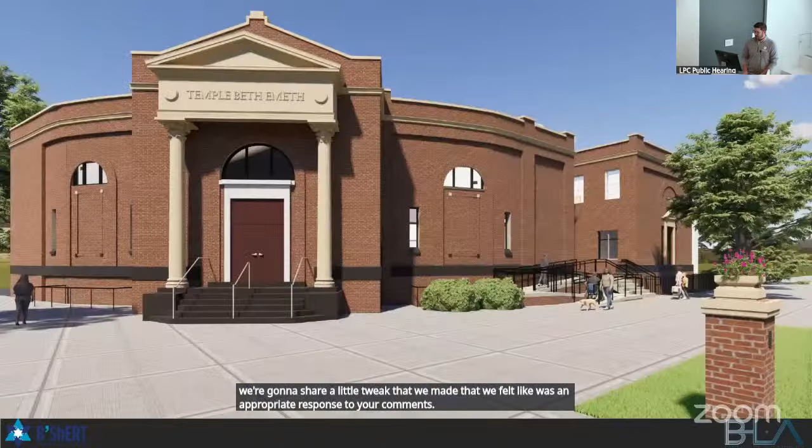So our initial design, which you can see here off on the right side, this is the main front of the synagogue on the corner of Church and Marlborough. We're proposing an ADA accessible ramp and stair, which kind of goes into that alleyway on the right side of the screen.

This would be the view from further down the street. You can see down the alleyway, we were originally proposing a double switchback ramp with some wire infill, and then kind of down in the alley, you can see a glass canopy and vestibule that extended a little bit out from the existing building.

Just looking at this in Axon to kind of give you an understanding of its connection to the building, you can see the ramp out front, the walkway down the alley, and we were trying to align our glass canopy with the existing stained glass mullion. Again, trying to not touch it, but still provide as much light and then coverage to anybody waiting at the front door. The existing vestibule is too short door to door, so we were proposing to pull the front door out in order to make it fully ADA accessible.

Our first review, you kind of expressed some concerns about the railing. You wanted us to explore the idea of maybe sloping the walkway in the alleyway, and then also take a further look at the canopy itself.

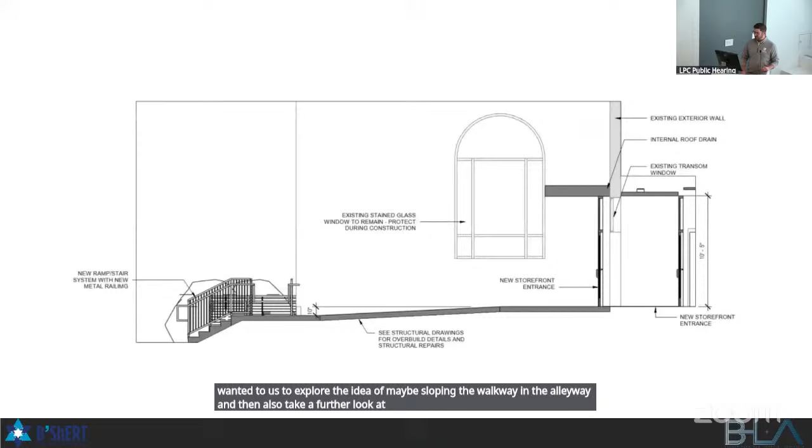So this is a section of kind of what we're proposing. I just want to share with you the sloped walkway. We have an interesting condition where there's existing windows in the alleyway that we kind of have to move our storefront around for the vestibule. So we pulled it all the way back close against the building in order to maintain some coverage for somebody standing in front waiting to get in the door.

And then we stopped our new canopy just short of the stained glass so we don't interfere with it at all. The 1 to 20 slope in the alleyway itself gets us 10 inches of elevation change, which does have an impact on the ramp out front, which reduces it to just a single switchback. You can also see here that we've changed our infill to a vertical infill to kind of get away from the cable infill.

If you look down the alleyway, you can see our shorter, more modest vestibule, kind of addressing those issues. One of the concerns we have with the sloped alleyway coming from the door is that the ramp ends up terminating into stairs, which we feel isn't the safest condition. So we're trying to balance adding accessibility to this building while also making sure it's safe.

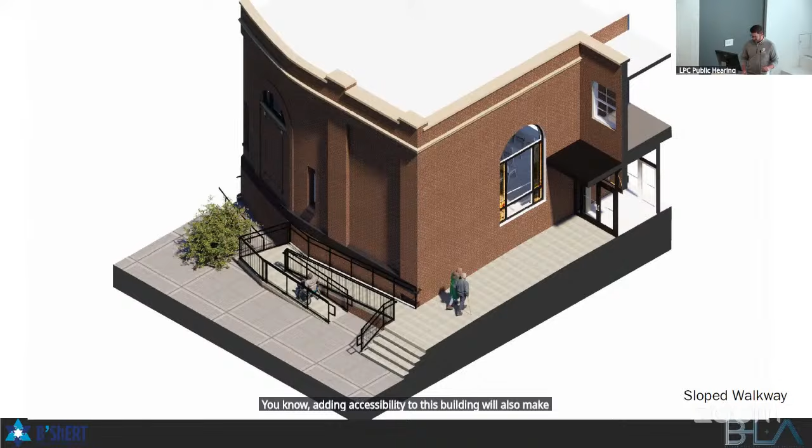We felt like this vestibule response was a good one, so we tried to carry that over into a new proposed design, again with the same vestibule you just saw, but we're getting rid of the ramp in the alleyway to try to remove that unsafe condition.

As you can see from the front here, we go back to a double switchback, but we're removing as much infill as we can by code. So we only have infill on the railing on the first switchback and at the landing, and below that we don't have any infill to remove any visual noise. As you look down the alley, you can see the existing vestibule pulled against the building, creating some coverage for anybody waiting to get in the building.

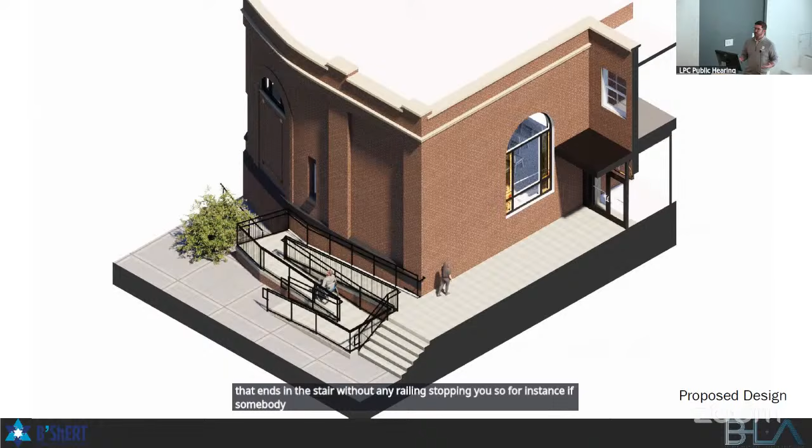Commissioner Ginsberg: I don't quite understand why you're saying the 1-in-20 would be unsafe. Can you explain that, please? So by nature it's not unsafe, but we think a ramp that ends in a stair without any railing stopping you is a problem. For instance, if somebody loses control over the wheelchair, the ramp then rolls down right into a stair and they could go over the edge of the stair. But there would be a level space in front of the stair, and in front of the ramp, yes, but there's still nothing to stop you from continuing on.

Commissioner Goldblum: Could you just put a rail in the middle of the stair? You could, you'd end up kind of hitting yourself in the middle of your body on a railing. While it would stop you from going down the stair, I'm not sure it's the greatest solution. We are happy to move forward with the sloped ramp in the alley; we think this is a fine solution. We just have our safety concerns, and we wanted to present an option where we didn't have that unsafe condition.

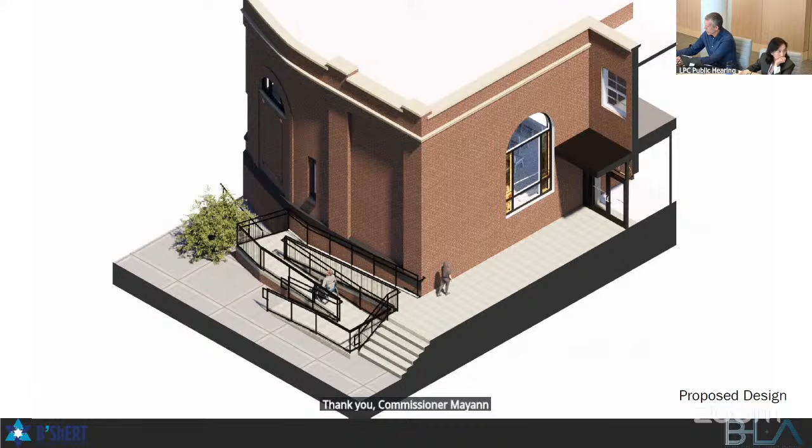Thank you. Commissioner Mann: Yeah, I appreciate the responsiveness to the comments as well. I too think that utilizing the 1-in-20 slope to eliminate one of the switchbacks is ultimately less visually busy and fussy. I would favor that solution. I would be fine with a center handrail at the stair as well, and I think that would likely solve the applicant's safety concerns, as well as clearly meeting all the code requirements.

Thank you. Commissioner Goldblum: I agree, I think that Mark's solution is the way to go. Thank you. Commissioner Kumbe?

And Commissioner Chen: I just want to add, I think the applicant's point on the alleyway 1-to-20 pitch, I do understand, and I concur in the sense that having been a victim several times of flying through black ice, it is very dangerous because of the wet conditions we're experiencing all over the world. That danger exists. Obviously the double-back is a less elegant solution, but from a safety standpoint, I tend to agree with the applicant.

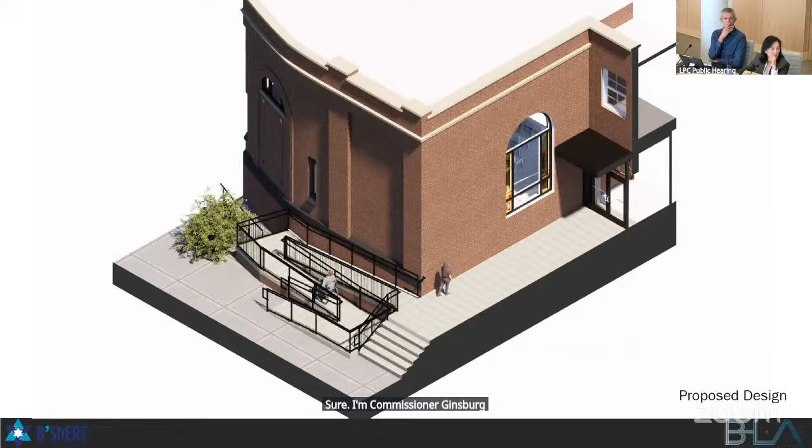Commissioner Ginsberg: That's a valid point. They can always put some electric heating in the ramp that they turn on when they have icy conditions to resolve that.

Good point. I think it's up to the rest of the commission if you think that is the way to go, because the key to radiant heat is to make sure the building maintenance person remembers to turn it on. It was a classic lawsuit where an architect put in a giant radiant heat system on the parking lot so you don't have to shovel the snow. No one ever told the operator. The switch was behind the desk, and it was a multi-million-dollar lawsuit. Wow.

Yeah, I tend to agree with Commissioner Ginsberg and Commissioner Mann. I understand there might be a slight risk with the slope. I think if they explored with staff possibly putting that center rail, that would be very helpful. A center rail will help a lot.

Thank you. Commissioner Ginsberg, would you like to read the motion? Yep, with regards to LPC 25-08077.

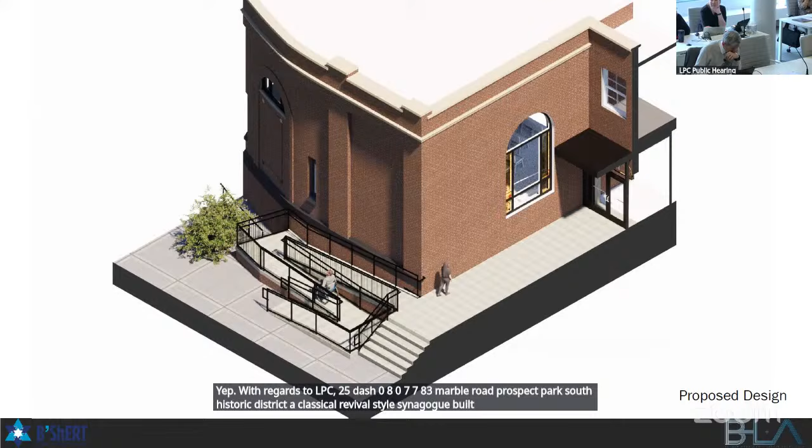83 Marlborough Road, Prospect Park South Historic District, a classical revival style synagogue building designed by Simon B. Eisendrath of Eisendrath and Horwitz, built in 1913. The application is to construct a barrier-free access ramp and entrance vestibule with canopy.

I note that the building style, scale, materials, and details are among the features that contribute to the special architectural and historic character of the Prospect Park South Historic District. I recommend approval as noted, finding that the primary entrance is no longer used by the congregation and the secondary side entrance corridor is used instead. Therefore, the location of the proposed ramp will provide barrier-free access to the entire building in the most direct manner possible while keeping the architectural features at the prominent central entrance intact.

That the removal of utilitarian doors, stairs, temporary ramp, and concealed concrete vault lights will not eliminate any significant architectural features, and the historic brick band course on the building facade will remain exposed. That the existing temporary ramp takes up nearly half of the corridor in this deep constrained passageway, resulting in an awkward, crowded condition, and the proposed ramp and vestibule will create a more welcoming and accessible corridor and entrance.

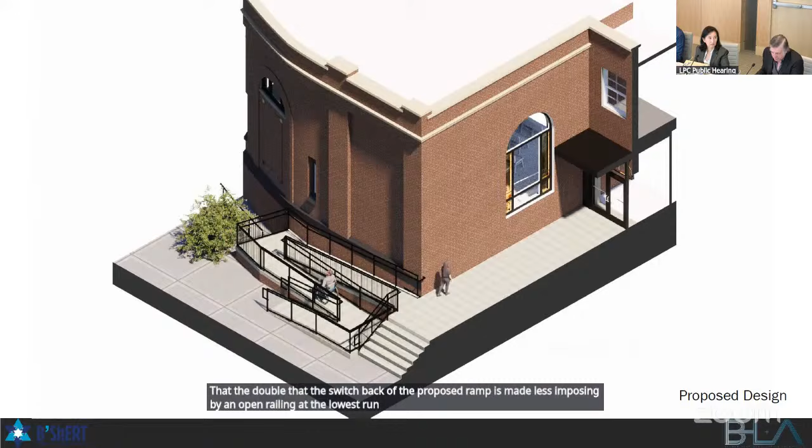That the switchback of the proposed ramp is made less imposing by an open railing at the lowest run. That material of the ramp, including red brick sidewall, concrete curbing, and surface, will harmonize with the material of the building, and the railings, comprising a simple pipe rail with picket infill, relates well to the simple historic ironwork found at the building.

That the new metal and glass vestibule entrance with projecting canopy and applied vinyl signage will be located deep in the recessed corridor with limited visibility from the public thoroughfare, will be light and transparent in character, and will not touch or obscure the adjacent stained glass window. And that the proposed work will not detract from the special architectural or historic character of the building or the streetscape of the Prospect Park South Historic District.

However, we want to see a 1:20 slope of the path in the alleyway so that the ramp in the front only has one switchback. So working with staff to resolve that, and potentially put a center railing at the stair to prevent someone in a wheelchair from accidentally going down the stairs.

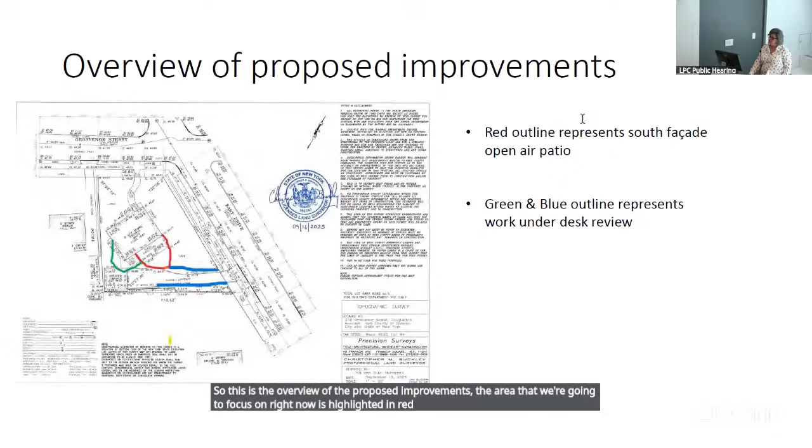So this is what we have currently. As you can see, it's completely inconsistent with the house. It's very modern looking, an eyesore, and it's actually beginning to become problematic in terms of its structure. So what we would like to do is take it down, and in the area outlined in red, we would create a flagstone patio with a covered awning.

So on East Drive, walking north, I've taken pictures to show what a passerby would see as they walk by the property. You could see the solarium when you approach the driveway, and then as you get to the edge of the driveway, you no longer can see the solarium. And so that would be removed.

So here on the bottom we have the existing facades from the south side and East Drive. And on the proposed above, it shows what it would look like once the solarium was gone.

So this is the proposed awning materials that we would like to use. And as you can see on the right-hand side, it shows a sample picture of what the awning would look like extended and retracted.

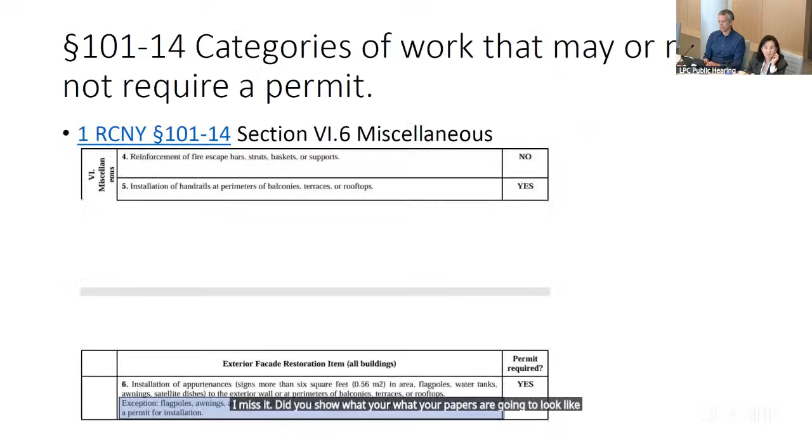Thank you. Commissioners, do we have any questions? Commissioner Goldblum asked: did you show what your pavers are gonna look like? It's irregular slate, matching the front walkway. And is it raised or right on the ground? It's level to the ground.

Any other questions? Let's see if we have anybody in the room who would like to speak on this item. Noting that there isn't, let me turn it over to Stephen Thompson to see if we have any remote testimony. Participants on Zoom wishing to speak, please raise your hand. Seeing none, I'll note for the record that Queens Community Board 11 recommends approval.

So let's go ahead and close the hearing if there's no other questions. Commissioner Mann, would you make a motion to close the hearing? So moved. Commissioner Ginsberg, would you second that? Second. All in favor, say aye. Aye. Any opposed? Okay, the hearing is closed.

I just want to note that the green and blue is actually something that is going to be approved at staff level. So I think what we're looking at here today is just the awning.

Commissioner Chen, would you like to start this one? Having lived nearby, across the border on the other side, not the Douglaston side but the Little Neck side, I'm very familiar with this area. And the applicant is right, the existing structure stood out, so I think to have it demolished is the right approach, as well as converting it to the paving material. I think it's appropriate.

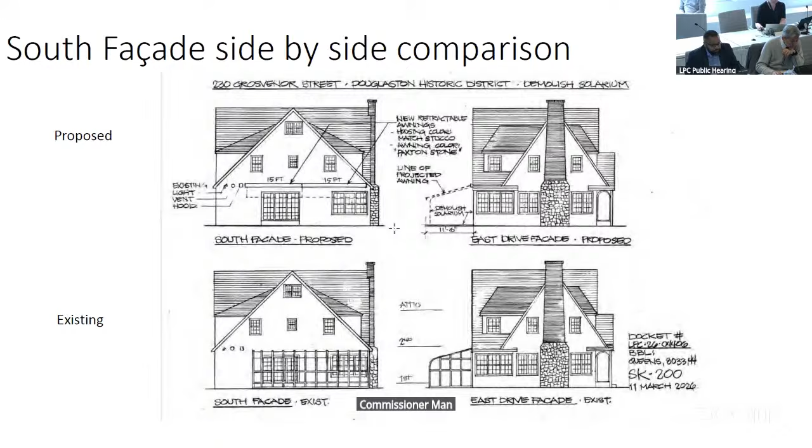Let's move to the next item. Next item is public hearing item number 2, LPC 26-05817, an application for a certificate of appropriateness in the Borough of Brooklyn, Block 1943, Lot 32, 372 Clinton Avenue in the Clinton Hill Historic District. This is an altered neo-Grec style row house designed by Robert Dixon and built in 1878. The application is to construct a 2-story rear deck.

Good afternoon, good morning, Commissioners. James Rusiello, Preservation Staff. The application is 372 Clinton Avenue, an altered neo-Grec style row house. Application is partially to legalize and correct violations, as well as to propose a double height balcony.

The rear facade, which is visible over shorter buildings on Vanderbilt Avenue, at the rear facade of this building, which was formerly a daycare center and is being converted to residential use. A fire escape that was put up in the 90s without permits, which altered the cornice and installed railings at the roof, was taken down pursuant to a permit.

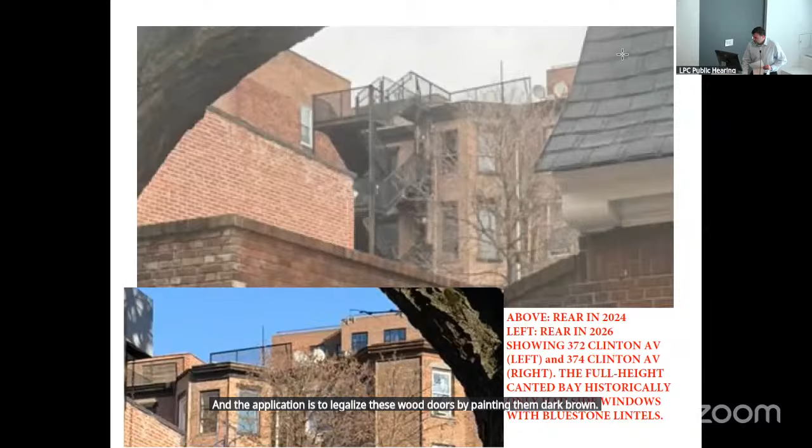Just going to go through. So here's the visible fire escape that was removed. The top floor window of the row house was altered by raising it a few inches with the insertion of the door. Again, the applicant is proposing to paint this door dark brown. Here are some visibility studies. And the application is to construct a double height balcony seen here.

Thank you. Commissioners, do we have any questions? Forgive me, I should just say, we have Agnes Muczynski, the applicant of record, with us as well for questions. Thank you. Commissioners, do we have any questions? Doesn't look like we do.

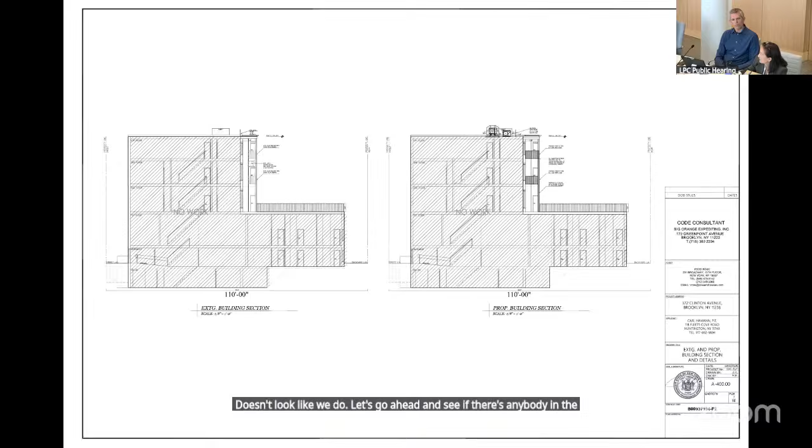Let's go ahead and see if there's anybody in the room who would like to testify. Noting that there isn't, let me turn it over to Stephen Thompson to see if we have any remote testimony. Participants on Zoom wishing to speak, please raise your hand. All right, seeing none, I'll note for the record that Brooklyn Community Board 2 recommends approval.

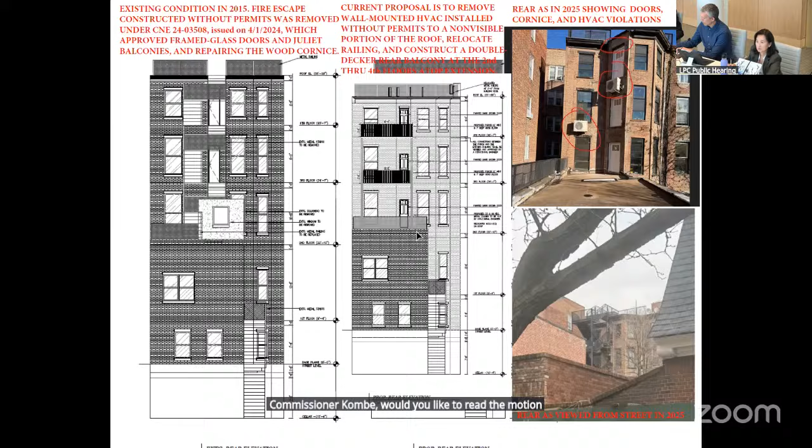Yes. In the matter of LPC 26-05817, 372 Clinton Avenue, Clinton Hill Historic District, an altered neo-Grec style row house designed by Robert Dixon and built in 1878. This application is to construct a two-story rear deck. I note that the building style, scale, materials, and details are among the features that contribute to the special architectural and historic character of the Clinton Hill Historic District. I recommend approval, finding that the proposed work at the rear facade will be seen only obliquely and incidentally from the limited vantage points of Vanderbilt Avenue over shorter buildings and will not call undue attention to itself.

That the rear facade was previously altered and the modifications to shorten the bluestone lintel at the top floor do not detract from the facade composition, that the proposed two-story metal deck with picket railings at the side of the projecting bays will be simple in design and will not overwhelm the residential scale and character of the building, that the wood door in the modified opening at the side of the bays accessing the new deck will be painted dark brown to harmonize with the building's existing fenestration, and that the proposed work will not detract from the special architectural and historic character of the building or the Clinton Hill Historic District.

Thank you. Commissioner Chen, would you second that motion? Second. Thank you. Mark, will you call the vote? Vice Chair Master, aye. Commissioner Chen, aye. Commissioner Ginsberg, aye. Commissioner Goldblum, aye. Commissioner Kombe, aye. Commissioner Mann, aye. With 6 in favor and none opposed, the motion passes. That's been approved. Thank you.

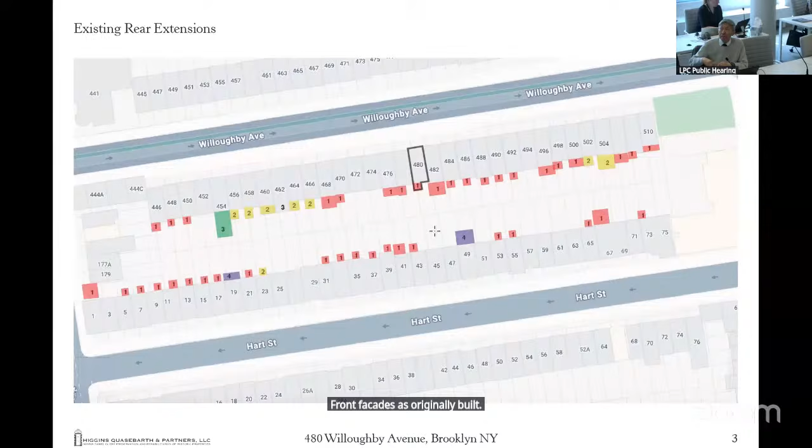The current block plan with existing rear extensions. The houses on the block were mostly developed in a short period of time between 1882 and 1884 on Willoughby Avenue and about 10 years later on Hart Street. Most of the houses were built with partial 1-story extensions, but around the block over time, many of these have been enlarged into full width extensions or partial extensions of 2, 3, and in a few cases, 4 stories in recent years prior to designation.

So what distinguishes this district is the preponderance of 2.5-story houses, as well as the way that those houses have evolved over time. As noted in the designation report, most of the district's houses were built as 2.5-story houses, with a few exceptions that were built to a full 3 stories. By the early 20th century, many of the original 2.5-story houses had been raised to a full 3 stories. This is clearly visible in the streetscape, where we see houses that pop up higher than their originally identical neighbors.

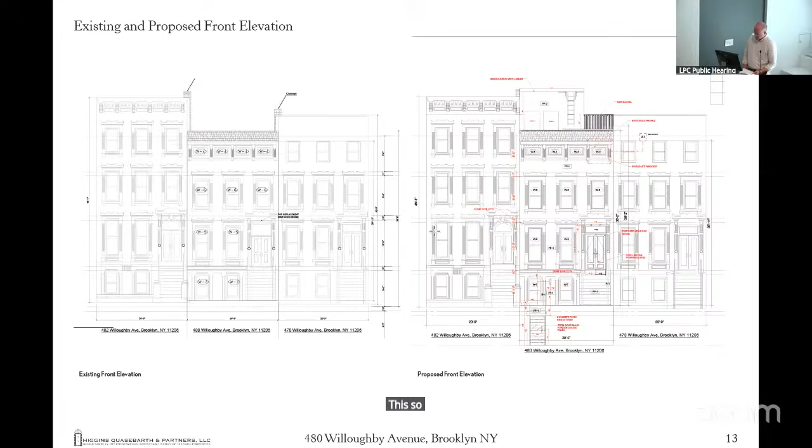So to look more closely at the scope under review today at the front, this elevation calls out all the scope, but we'll look at these top 4 windows first. Again, these are the short windows that are part of that characteristic top half story contained within the cornice.

If historic brick molds are found under the existing panning, they will be retained or their profile will be replicated for the new windows. If there is no evidence of the original brick molds, a typical neo-Grec profile will be integrated into the new windows.

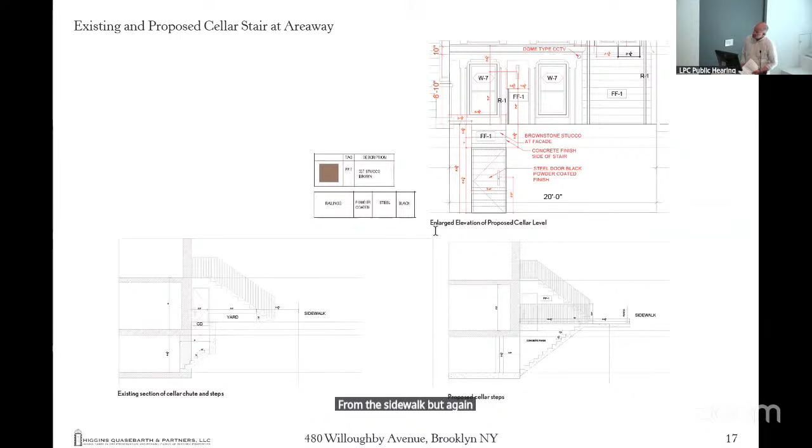Again, it's 12 feet 5 inches. The lots are 20 feet wide and 100 feet deep. The existing house is 20 feet by about 42 feet. At right is the plan with the extension. As you can see, it doesn't exceed the projection of the neighboring existing extensions, and of course it maintains a 30-foot rear yard.

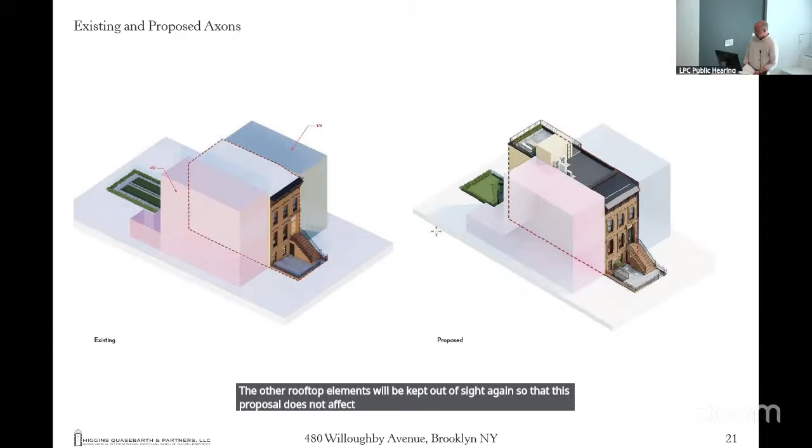Just some axonometric views for clarity. The roof of the extension will have a usable terrace with a railing, but the other rooftop elements will be kept out of sight so this proposal does not affect visibility from the street. The bulkhead and mechanicals—we've tested the visibility of those, so those are approvable at staff level.

Elevation—I think I'll move to the section. I acknowledge that approval of full height extensions is not necessarily very commonplace at the commission. We do think, in the context of this house and the constraints of its historic top floor, the strategy for an addition here is to retain the house's contribution to the historic streetscape as an original 2.5-story facade and add usable space at the rear where it will not be visible.

The rear simple windows, proposed for the rear extension. Here are plans that just illustrate this in plan form—you can see the layouts within the extension and the windows accordingly.

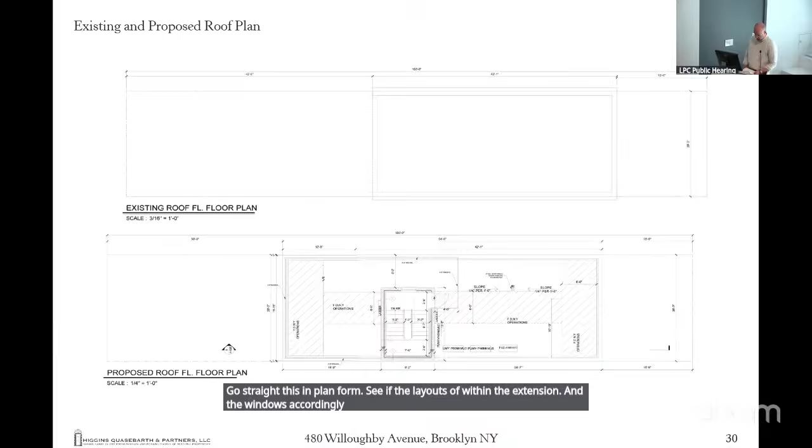And I'll conclude with the front facade. Again, this is an addition project oriented toward preserving the 2.5-story facade characteristic of the original development of the district. The windows will return that attic level cornice to its original appearance and modify the areaway to provide egress in the context of an overall restored bluestone areaway. Let me know if you have any questions.

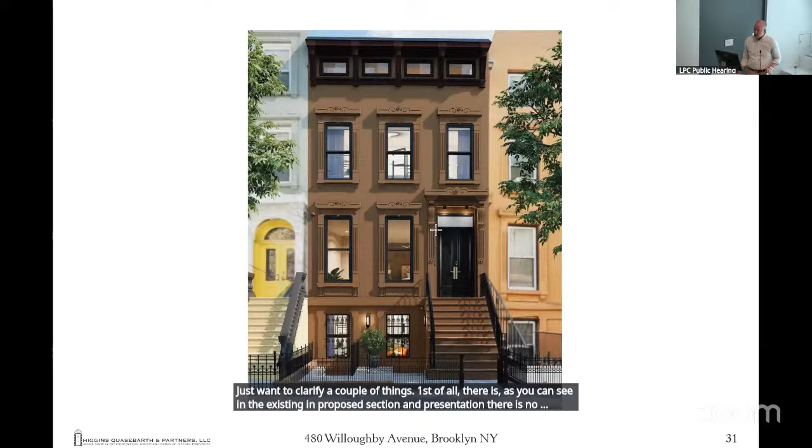Again, the rooftop bulkhead, which was mentioned by the community board, does meet rules for staff level approval. So it's not really part of the hearing scope today.

With regard to, I also just want to clear up any confusion. There was a mention of the idea of purchasing a house and exceeding building restrictions. I want to make clear that the addition is as of right under zoning. Also, the house was purchased 14 years ago, so it was certainly purchased before it was a designated district.

Certainly drainage is a legitimate concern, and obviously a proper drainage system will be part of the DOB review of the extension. We do believe that in this relatively spacious open yard, the 12-foot added depth, retaining a 30-foot yard beyond that, will still maintain a lot of open area in the rear.

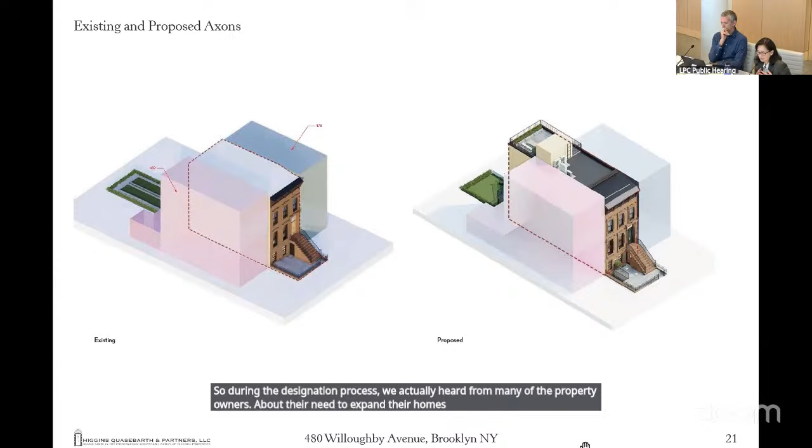is the first commission level application that we've had for this new historic district. So during the designation process, we actually heard from many of the property owners about their need to expand their homes to address family needs. At the time, Chair Carroll acknowledged this concern and noted that we understood their need and that we would work with them to accommodate that consistently with Landmarks law. So given that,

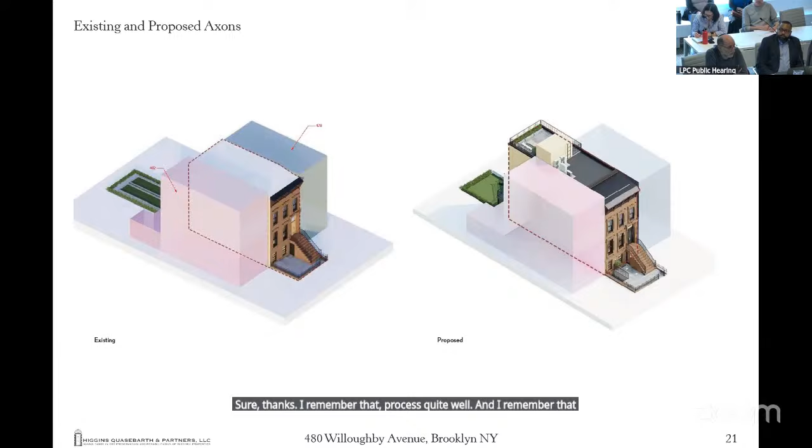Commissioner Goldblum, would you like to start this discussion? Sure, thanks. I remember that process quite well. I remember that statement by Sarah. And I think that, as the first out of the gate, this project does have a certain importance to it, as it does kind of set the path for how folks should look at it.

I think that the applicant made a tactical error here. I mean, the argument was, we're going to not touch the front, so we'll touch the back in a way that you never permit, or you rarely permit. I think that was a mistake.

If you look at the streetscape, it supports a higher front, especially with a mansard, which we've approved many times before. I think that the distinctive cornice is noteworthy and attractive, and it's lovely if they want to keep it. But I think that the adjacent buildings certainly show modifications that could support changes. I think that our precedents in other places would support that.

I think that the notion of putting a full-height rear yard addition on a block that has mostly 1- and 2-story additions is just not the way to go. I think it sets a bad precedent for the district, and I don't think it's acceptable. But I think I could accept this at 2 stories, which, if you look at the block plan, is kind of how the rest of the block is developed for the most part. I don't think I could accept full height.

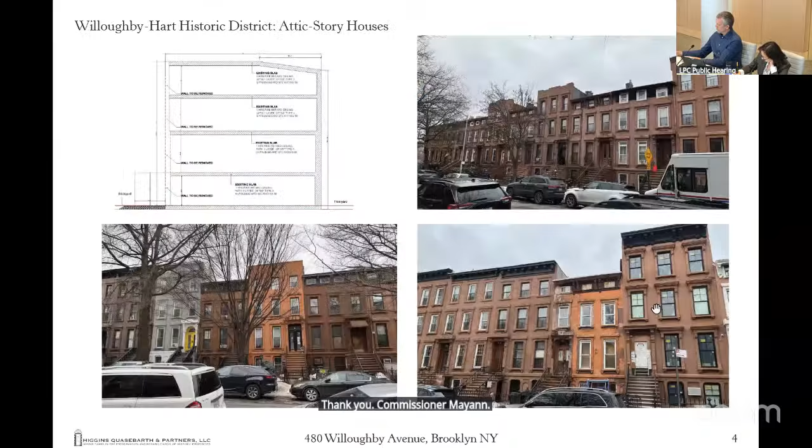Yeah, I too appreciate the heightened scrutiny, you might say, given to this application, as it's the first public hearing for this relatively new historic district. And so I appreciate all the public testimony and the neighbors coming out and speaking.

That being said, the commission does regularly approve rear yard additions in other historic districts that have very similar morphology to the block and row houses that we find here. And so there's well-established precedent that neighbors and homeowners can find in many other historic districts. And that precedent is generally to approve, allow rear yard additions, but not full height. Accordingly, I think that the rear yard addition here should be reduced by 1 floor.

I'm okay with the proposals at the front, including the stair and the new wood metal clad windows at the top. I think they're both functional and minimally invasive and improve an existing condition. I'm okay with those.

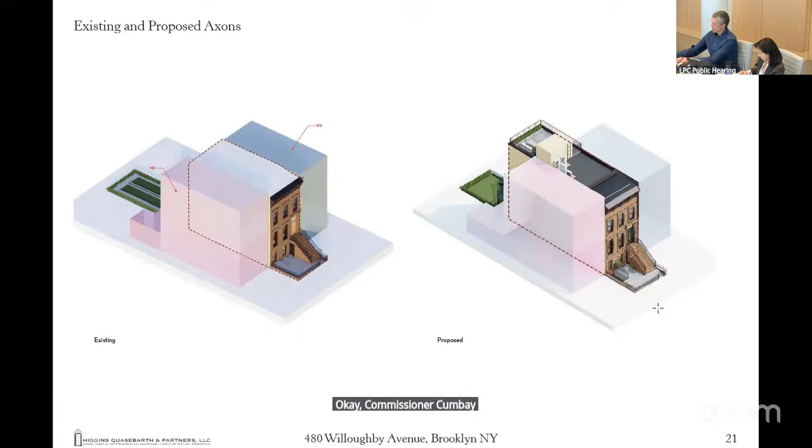Okay, Commissioner Kumbe? I am okay with what is being proposed for the front facade. As for the rear facade, I believe that it should be reduced by 1 floor, and as Commissioner Ginsberg has stated, that the fenestration arrangement on that rear facade be restudied.

So Commissioner Goldblum, are you okay with 1 floor? Okay, so would you like to read the motion? Sure, and ask them to maybe work with staff and take a look at the fenestration. Sure, thank you.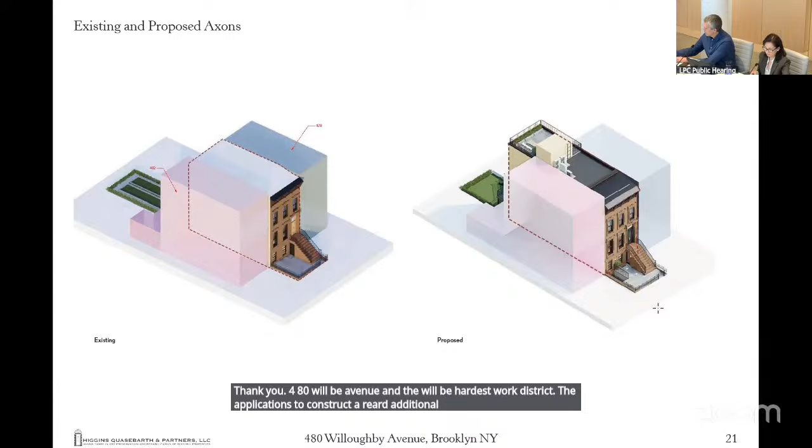Regarding 480 Willoughby Avenue in the Wallabout Historic District, the application is to construct a rear yard addition, alter and excavate the areaway, and replace windows. I note the building style, scale, materials, and details are among the features that contribute to the special architectural and historic character of the Wallabout Historic District.

I recommend approval with modifications, finding that the proposed rear yard addition will not be visible from any public thoroughfares, that the rear yard addition will not project farther into the rear yard than other rear yard additions at neighboring houses, or diminish the central green space, that the design and materiality of the rear yard addition featuring punched openings, stucco cladding, cast stone lintels and sills, and a dentelated cornice and a metal deck will be in keeping with the design and materiality of rear additions and secondary facades at other buildings of a similar age, type, and style within the historic district.

That the proposed work at the areaway and the replacement of attic windows will not damage or eliminate any significant features of the building or site, and that the excavation of a portion of their areaway to improve cellar access

at the existing hatch and stairs will be consistent with the alterations to enlarge access stairs within areaways at buildings of this age, type, and style within the historic district, and that the black finished metal areaway railings will be simple in design and in keeping with metalwork found at other areas in the historic district. That the black finished solid metal door at the cellar level will be only minimally visible from public thoroughfare, and that the proposed black finished metal clad wood single light awning windows will match historic windows in terms of configuration, details, and finish.

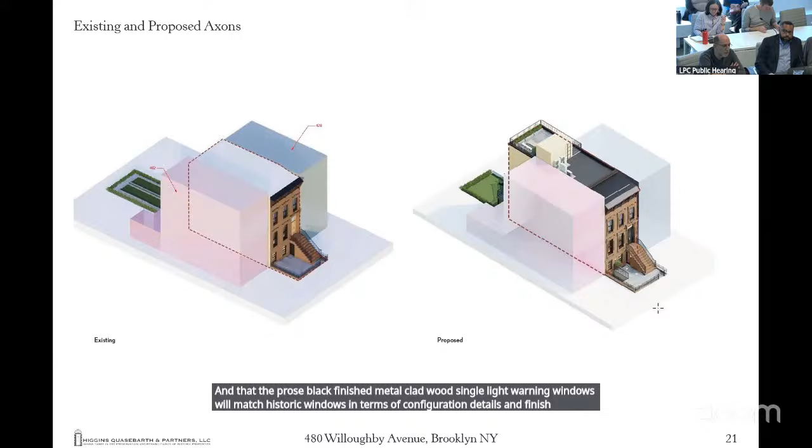The proposed change in operation from casement to awning will only be perceptible when the windows are open, and the proposed change in material from wood to metal clad wood will not be perceptible when viewed from public thoroughfares. However, I recommend that the applicant work with staff to reduce the height of the rear yard addition by one floor and to modify the design of the rear addition's top floor windows to conform with a three across pattern. Thank you.

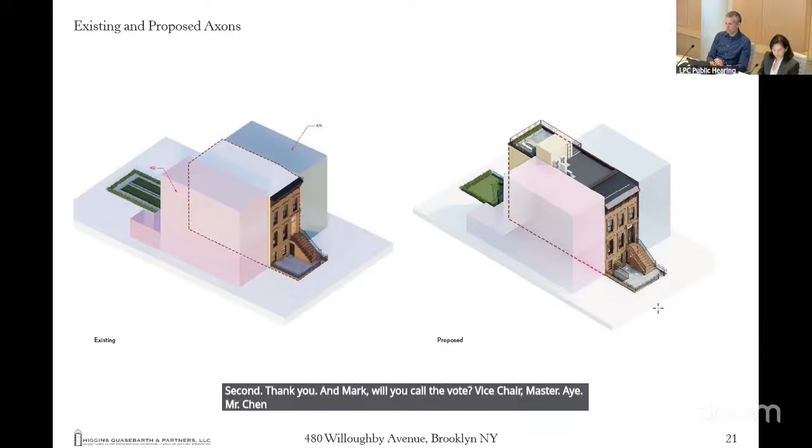The next item is public hearing item number 4, LPC 26-08279, an application for a certificate of appropriateness in the Borough of Manhattan, Block 1218, Lot 45, 140 West 88th Street in the Upper West Side, Central Park West Historic District. This is a Renaissance Revival style row house designed by Neville and Bagg and built in 1894. The application is to construct rooftop and rear yard additions and reconstruct the rear facade.

Good morning, everyone. Our proposal is for a penthouse and occupiable roof addition, as well as a new rear extension for 140 West 88th Street project. It's an existing 3-story plus cellar and basement brownstone in the Upper West Side.

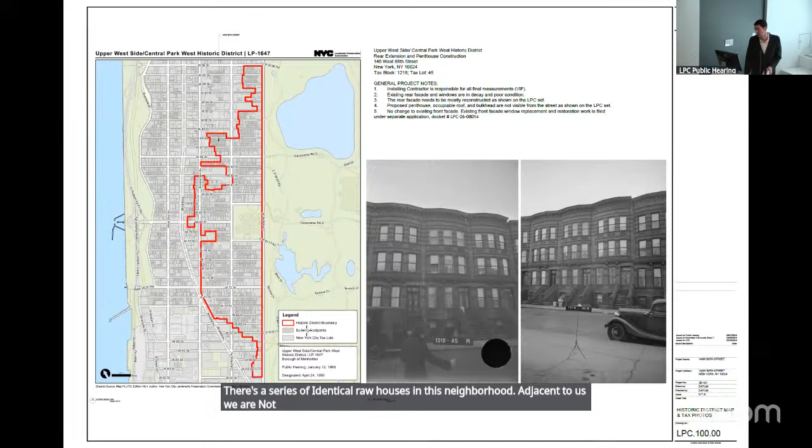There's a series of identical row houses in this neighborhood adjacent to us. We are not going to touch the existing front facade. We will restore it and replace the windows in kind, but that is filed under a separate application for staff level approval. This presentation is about the penthouse extension and the rear extension.

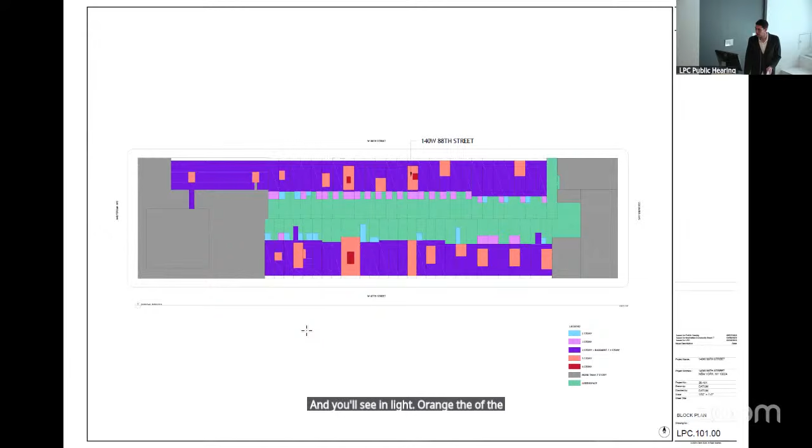The block plan shows the height conditions around the block. 140 West is shown with its proposed penthouse and bulkhead extension, and you'll see in light orange the fourth story heights around the block, as well as the red with bulkheads. The block at our property side has partial rear extensions, and some of the buildings have gone full width with these extensions, while some remain partial.

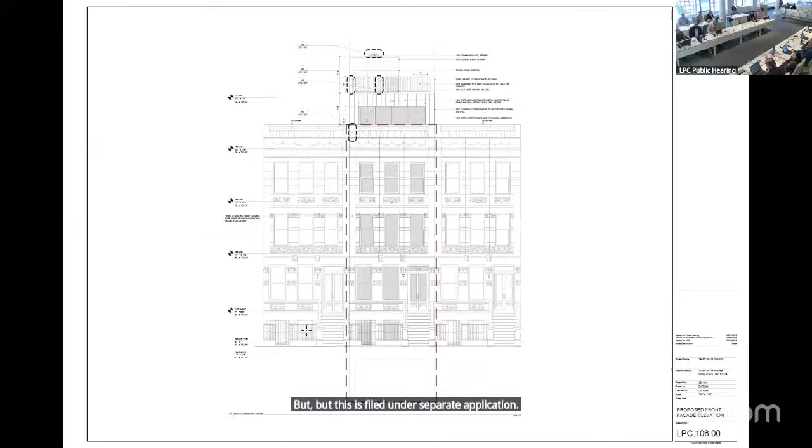This elevation shows the front view of our proposal with the additional penthouse, railing, and bulkhead. We are sinking the penthouse into the top floor with the roof assembly, so it's only partially shown in the elevation. Some of our details, you'll see on the top left, the cornice detail. The front existing cornice will remain, and we'll sink the penthouse floor in and keep the front facade as is, creating a high parapet at this area.

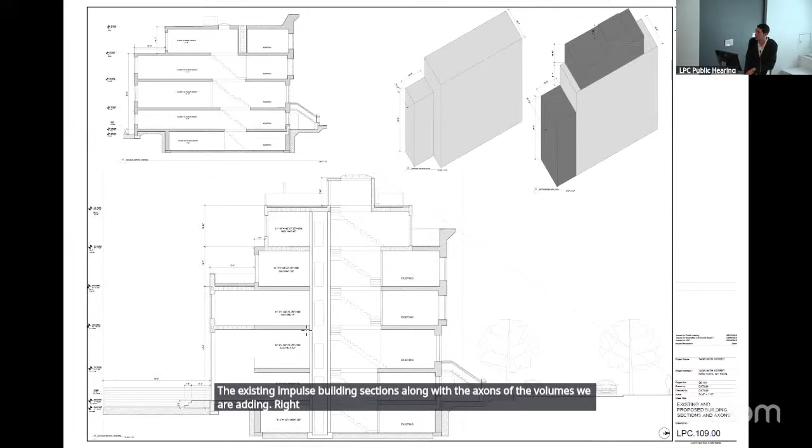This is the front 3D view of our proposed penthouse and bulkhead extension, and you can clearly see how we are sinking into the penthouse. Here are the existing and proposed building sections, along with the axons of the volumes we are adding. The rear extension we are keeping at its existing projection, already 30 feet from the rear property line. We are just extending it to the full width. The penthouse and bulkhead extensions are shown here at the top.

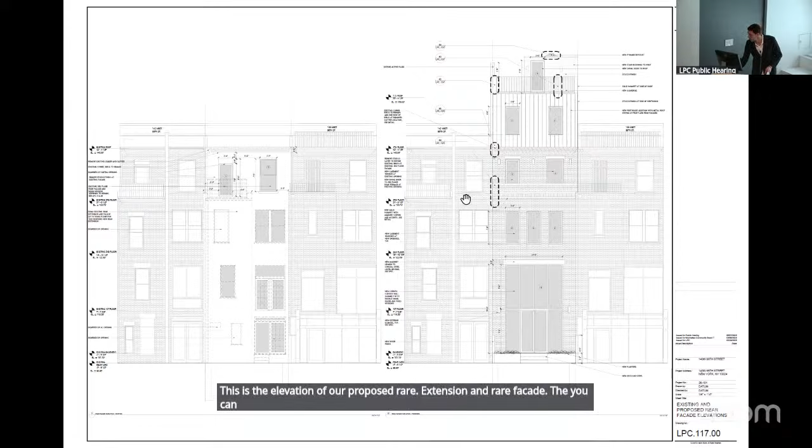This is the elevation of our proposed rear extension and rear facade. You can see the 3-story extension is shown here. The existing fourth floor we are keeping is shown here, along with the penthouse and bulkhead above. This shows how we are planning to keep the existing rear 4th story.

Existing and proposed elevations are shown. We will replace the existing double hung window with a casement window. Currently, the lintels are not exposed, and looking around the block to the adjacent neighbors, it seems like lintels were painted in all sorts of colors. So we will evaluate the condition of the lintels once we get to the restoration point, and if they're in good condition, we will keep them. If not, we will replace in kind with the same material.

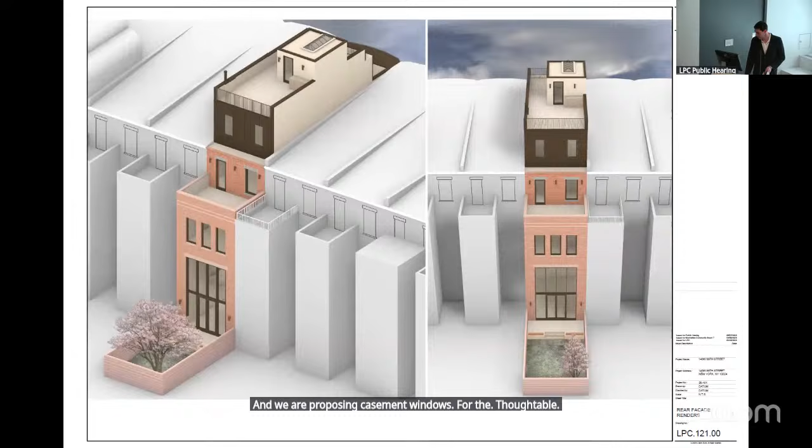The proposed window assemblies for the rear extension include a double height space, a large fixed window with swing door assembly, and we are proposing casement windows for the facade. This is the rendering of the rear extension.

We have a magnolia tree on this property which is very special, and we want to play on that with our proposed lintel and sill and parapet coping stone to have a similar color. The existing brick of the fourth floor is shown here, and we have new brick that's in line with the brick of the neighbors and the properties around.

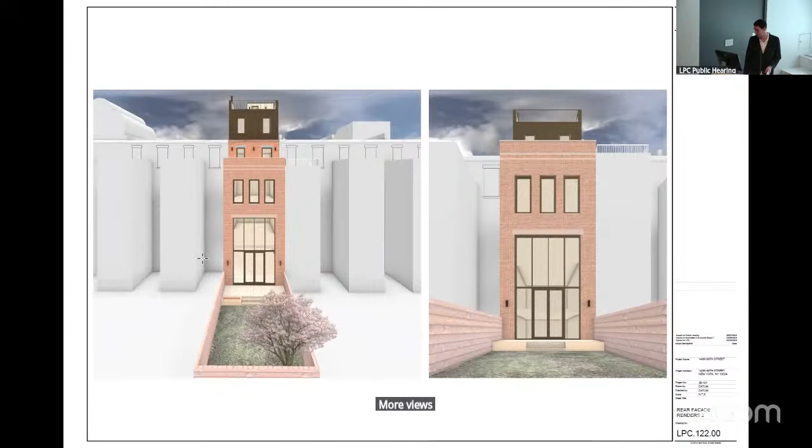Views. More views of the rear facade from the rear yard level. Proposed materials: the penthouse cladding, along with the coping in general, will be medium bronze color, as shown in the renders. Our proposed new brick is here, and our proposed lintel and window sill stone is shown here.

These are some of the proposed plans. Just to give context, we are renovating this building to be a single family residence. And I believe that's it. Thank you.

Thank you. Commissioner Goldblum, did you have a question?

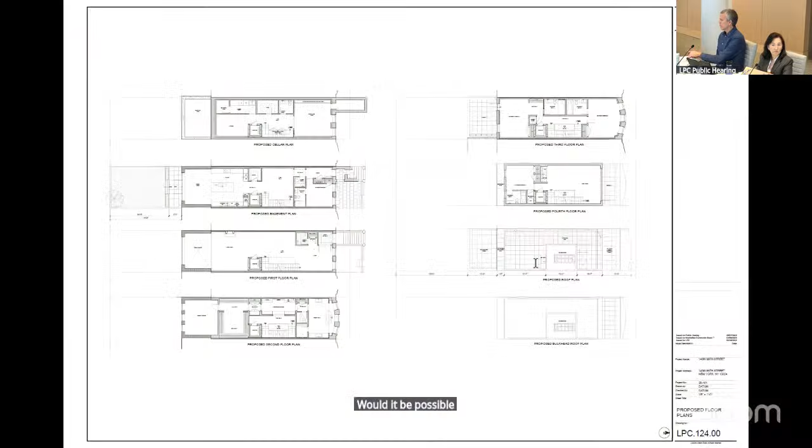Since the only visibility of your proposed addition from the street is of the top corner of the bulkhead, would it be possible to slope the roof of the bulkhead and thus eliminate the visibility of that corner altogether?

We have a skylight at the bulkhead. I'll go to the front. That's why... Can't you put a skylight on a sloped roof? We can. We'd drop the ceiling height to the bare minimum at the bulkhead to limit this visibility. We can slope the front bulkhead roof, but the skylight in the proposed section is coming almost at the border of it, aligning with the stair opening below. So we can slope it and shrink the skylight, but it would not maximize the light you get from the stair hall.

Good, thanks. Thank you. Commissioner Ginsburg?

Two questions. First, what's the floor to ceiling height in the penthouse? The floor to ceiling height of the penthouse is 10 feet. And the second issue: you can do sloped skylights, but you could also put windows on the walls to bring light into that stair with the slope. Yes, and I'll clarify, the penthouse ceiling height is 10 feet and the bulkhead ceiling height currently is 6'8".

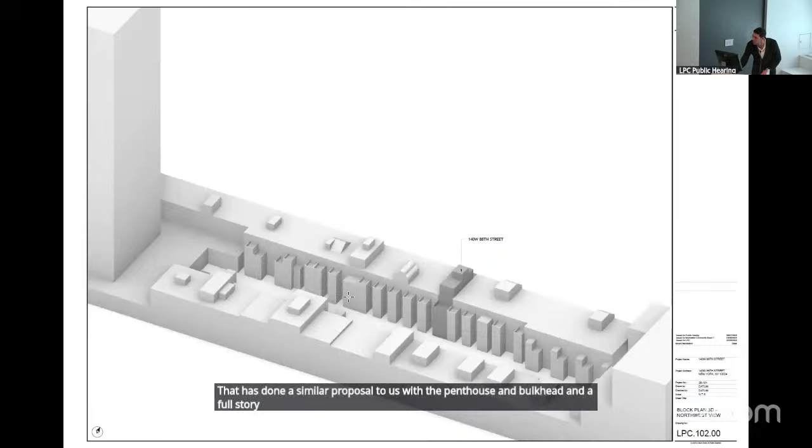So starting with the rear extension comment, I just want to point out that there is already a building here that has done a similar proposal to us with a penthouse and bulkhead and a full story rear extension. So I will argue that the pattern of these partial extensions at the block was already broken by this building. That's just a precedent we had.

For the front facade restoration, yes, we will restore the front facade fully with rebrownstoning. And I will also note that my client, Jonathan, who is here, has restored two buildings down, this building you see over here, previously, and we are proposing to do the same. So full facade restoration, window replacement in kind.

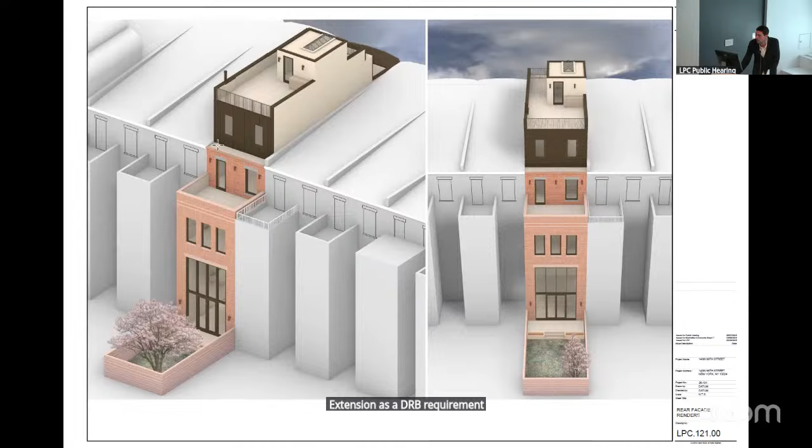The lintel comment on the 3rd floor rear, we have no problem with that. And I will also mention that we were told that we were proposing planters up here where we have a 3-foot setback for our new penthouse extension as a DRB requirement. We were covering this setback with planters, but they were freestanding since this is such a narrow area and it's not occupiable. We removed the planters as requested.

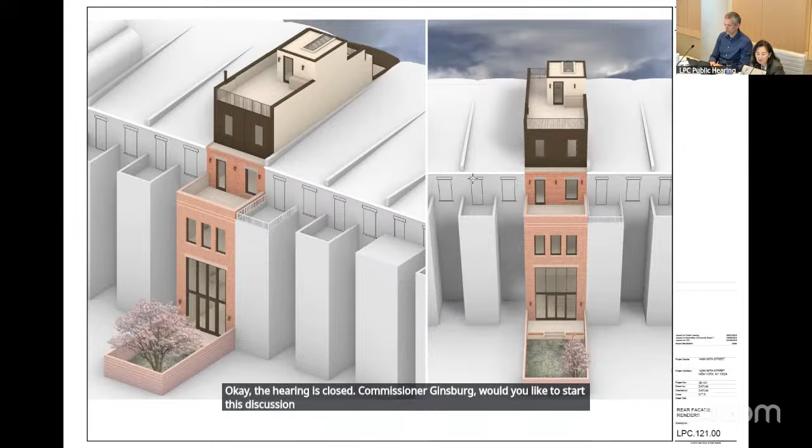Commissioner Ginsburg, would you like to start this discussion? Yeah. I have two comments. One is, I think that the penthouse, you could lower by a foot, which would help visibility, and that you also could slope the front of the stair bulkhead. So between those two things, you'd be able to get the work to not be visible from the street. And with those changes, I can support this and find this appropriate.

Thank you. Commissioner Mahan? Yeah, I agree. The visibility is so close to non-existent that seems a very easy lift to get it to be completely non-visible. I'd leave it to the applicant as to how to accomplish that, but there are certainly multiple routes to doing so. I'm okay with extending the width of the existing rear yard addition. That seems reasonable. And I'm okay with the rooftop addition as well, given the existence of other rooftop additions and its lack of any visibility.

Thank you. Commissioner Goldblum? Commissioner Kumbe? I agree as well. There can be some work done too.

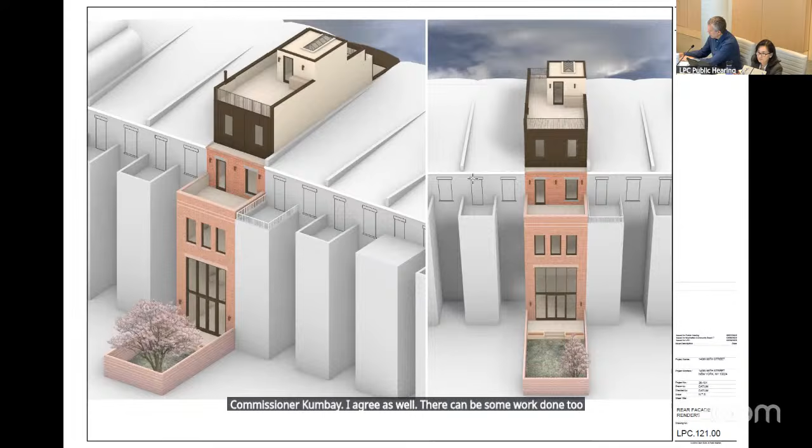Commissioner Chen, I agree as well. Thank you, I also agree with your comments. Commissioner Ginsburg, would you like to read the motion?

With regards to LPC 26-08-279, 140 West 88th Street, Upper West Side, Central Park West Historic District. A Renaissance Revival style townhouse designed by Neville and Bagg and built in 1894. Application is to construct a rooftop and rear yard addition and reconstruct the rear facade. I note that the building style, scale, materials, and details are among the features that contribute to the special architectural and historic character of the Upper West Side Central Park West Historic District.

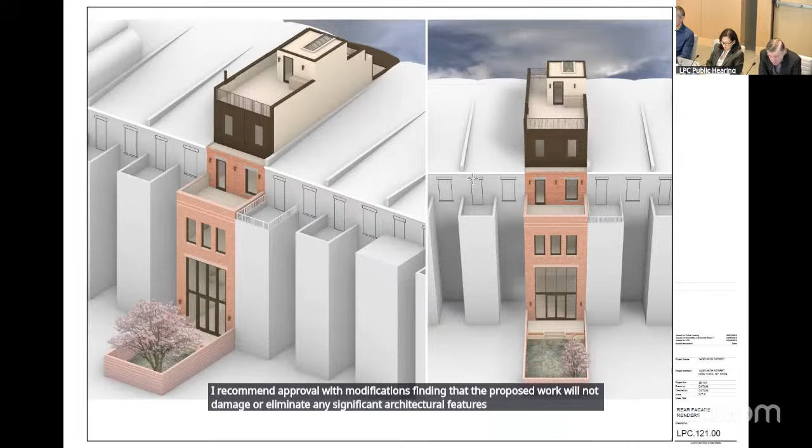I recommend approval with modifications, finding that the proposed work will not damage or eliminate any significant architectural features, that the rear yard addition will not be visible from any public thoroughfare, that other rear yard additions with similar height and depth exist within the block, and that the proposed 3-story rear yard addition will be modest in scale and will not overwhelm the building, adjacent buildings, or the block's central green space. That the rear yard addition will not rise to the full height of the building, thereby preserving the sense of the building's original form and fenestration as part of the row.

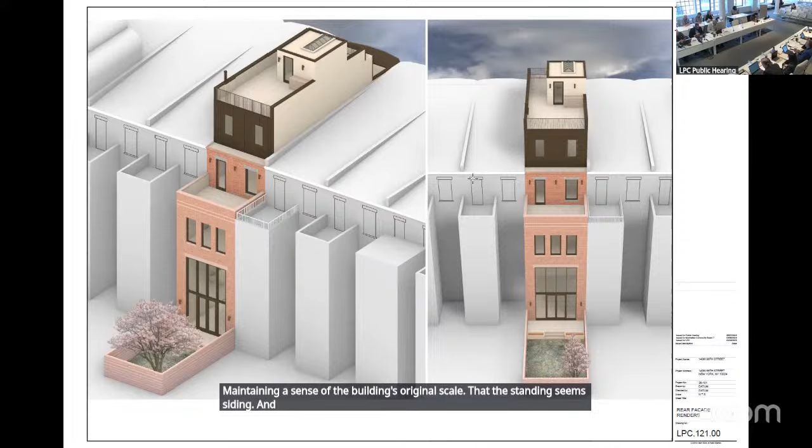That the proposed material and design of the rear yard addition, featuring brick and cast stone lintels and sills of new window openings, single pane windows and double height windows, and door assembly at the bottom 2 floors, will be in keeping with the scale and residential character of rear yard facades found within the block and the historic district, and that the proposed rooftop addition will be set back from the front and rear facades, maintaining a sense of the building's original scale. That the standing seam siding on the front and rear facades, stucco siding on the side facades and bulkhead, and simple fenestration of the rooftop addition will be in keeping with the character of the rooftop additions within the Upper West Side Central Park West Historic District.

That the cumulative effect of the rooftop and rear yard addition will not overwhelm the building or the row, and that the work will not detract from the special architectural or historic character of the building or the historic district. However, I find that portions of the bulkhead at the top of the rooftop addition will be visible from West 88th Street above the neighboring row houses. Therefore, I recommend that the design of the bulkhead be modified and that any visible railings or parapets at the rooftop addition be adjusted to eliminate the visibility from West 88th Street.

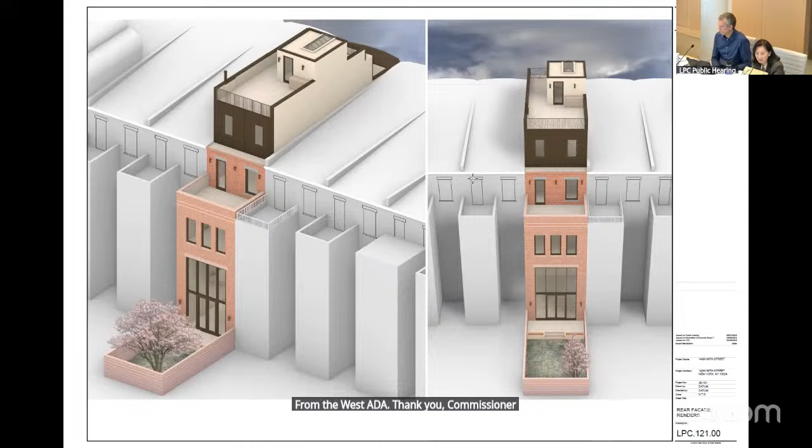Thank you. Commissioner Mahan, would you second that? Second. Thank you. Mark, will you call the vote? Vice Chair Master, Aye. Commissioner Chen, Aye. Commissioner Ginsburg, Aye. Commissioner Goldblum, Commissioner Quimby, Aye. Commissioner Mann, Aye. With 6 in favor and none opposed, the motion passes. That's been approved, with modifications, please continue to work with staff.

Thank you, let's move to the next item. I'm going to read 2 items in at one time. They're being presented together, although they're separate applications, under separate ownership. First is public hearing item number 5, LPC 26-09397, an application for a transfer of development rights in the Borough of Manhattan, Block 1413, Lot 124, 159 East 78th Street, the 159 East 78th Street House Individual Landmark. This is a vernacular Italianate-style row house built in 1861, and the application is to request that the Landmarks Preservation Commission issue a favorable report to the City Planning Commission regarding the continuing maintenance program for the landmark in connection with the transfer of development rights pursuant to Section 7542 of the zoning resolution.

And public hearing item number 6, LPC 26-09379, also an application for a transfer of development rights in the Borough of Manhattan. This is Block 1413, Lot 25, 161 East 78th Street, the 161 East 78th Street house individual landmark, a vernacular Italianate style row house built in 1861. Application is to request that the Landmarks Preservation Commission issue a favorable report to the City Planning Commission regarding the continuing maintenance program for the landmark in connection with the transfer of development rights pursuant to Section 7542 of the zoning resolution.

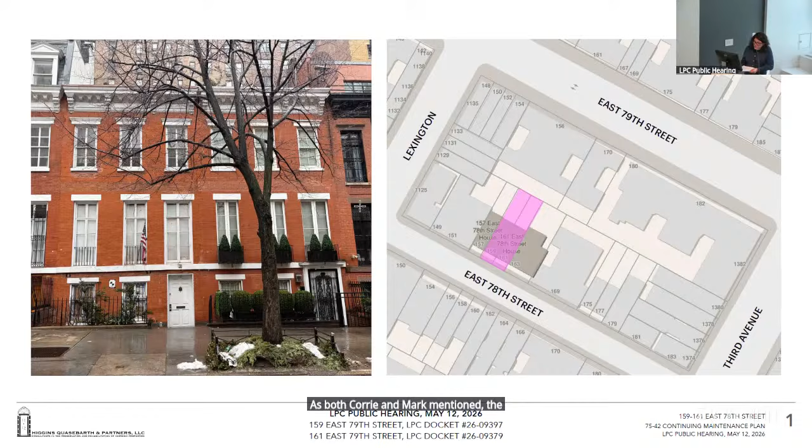As both Corrie and Mark mentioned, the proposal before you today is establishing a continuing maintenance program for both properties to facilitate the transfer of development rights pursuant to Section 7542 of the zoning resolution. And Deirdre Carson from Greenberg Traurig is here to answer any questions as they come up.

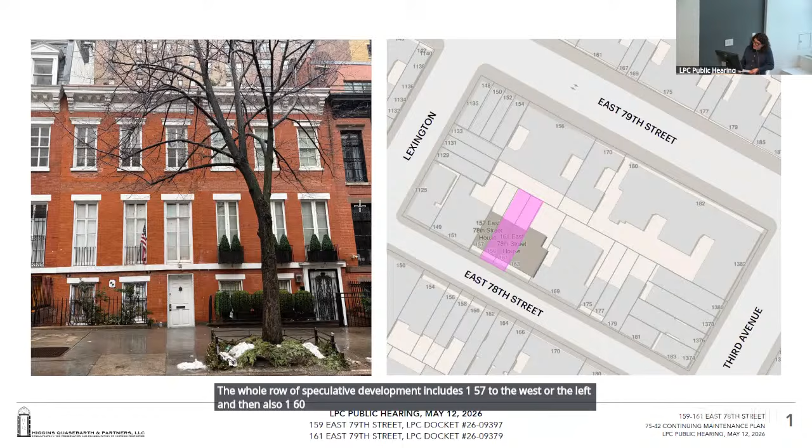So both of these houses were designated as individual landmarks in 1968. They are both 2.5-story brick houses with brownstone trim that were speculatively developed in 1861 by a painter named John Turner and a builder named Henry Armstrong. The whole row of speculative development includes 157 to the west or the left, and then also 163 and 165 East 78th Street to the east or to the right in this photo.

Mark explained this very well, but this is a new section of the zoning resolution that was introduced as part of City of Yes, and this allows individual landmarks to more easily transfer their development rights to a broader area around the site and without having to go through the ULURP process. It also, from a landmarks perspective, only requires the establishment of a continuing maintenance plan, which allows smaller landmarks, such as these individual homes, to relieve themselves of their excess development rights.

Each house has about 4,200 square feet of excess development rights, and the market rate for development rights right now is approximately $400 per square foot.

Here are our earliest photos of the houses, a 1929 photo on the left and a 1930 photo on the right. As I mentioned, these were all speculatively developed, and as they were sold off to individual homeowners, some changes happened in a consistent way, such as the removal of the stoops, which are all gone by this time, and some in different ways, such as window configurations and treatment at the base. We can see in both photos that by 1929, the brownstone trim was painted a light color.

Here are the two tax photos for 159 and 161 East 78th Street, which we'll look at in more detail adjacent to the existing conditions. And here's a photo between the 1940 tax photo and a 1979 Landmarks Preservation Commission photo showing some changes that had taken place, such as a PTAC unit that had been installed at 159 and flower boxes that had been installed at 161.

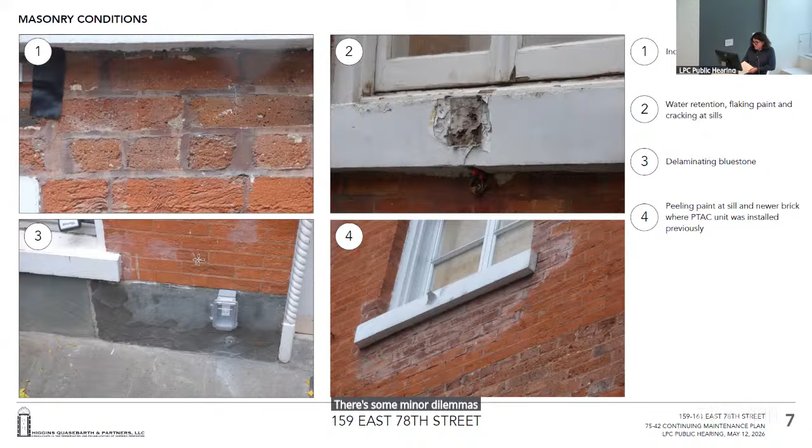This will be repaired as part of the work. Top left, we have some mortar that is incompatible with the older brick. It's both too hard, causing the brick to spall, and is also smeared over the front of the brick, which causes technical issues. There's some minor delamination of the bluestone water table on the bottom left, and on the bottom right, that's the area of the PTAC unit with some replacement brick showing earlier repairs of the building. The windows are in fair condition, though there is some

glazing failure, which you can see most clearly in the center, where air is getting in between the insulated glazing units. The wood cornice at the top of the house is in good condition. At the back, there is a 1983 LPC approved rear yard extension, which is in very good condition, both the windows and the masonry. The bottom floor is currently being replaced with new infill, so that's why this site is under construction.

We have photos from the adjacent yards, one from 157 and one from 161. The proposed work is selective brick replacement where brick is cracked or spalled, brick patching where embeds have been removed, and minor repairs. There's a little bit of existing paint on the brick surfaces that will be removed. Incompatible mortar that we saw before will be removed and repointed with a softer, more compatible mortar to match existing. Patching brownstone trim where necessary, and repainting areas of missing or flaking paint at the brownstone trim.

The front facade window replacement has already been approved by Landmark staff for new wood windows to match historic in configuration, operation, and details. Going now to 161 East 78th Street, there were densely gridded multi-light windows that had been replaced from the original over time, seen in the 1940 photo. Landmarks approved a simplified version of those windows that better relates to the historic row, which we see on the right.

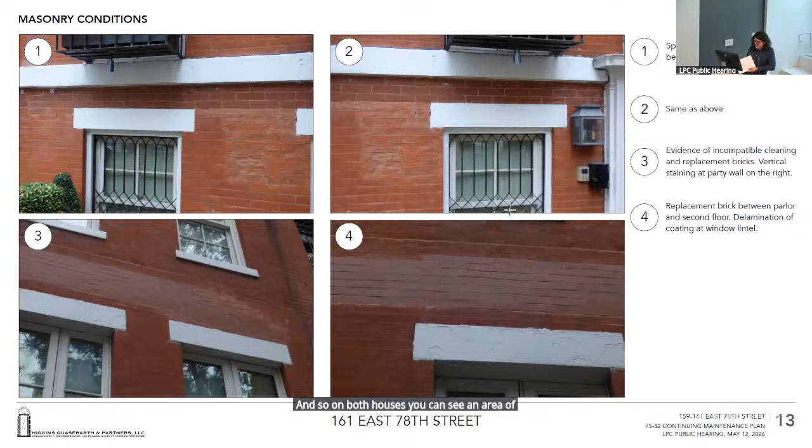And then at the rear, there's a 2003 approved rear extension to this house, and the brick and windows are in excellent condition and no work is required.

So the proposed restoration scope is very similar to 159 and includes brick repair and replacement, removing any existing paint from brick surfaces, removing incompatible mortar, repointing where required, patching brownstone trim where necessary, repainting areas of missing or flaking paint at the brownstone trim, and then re-waterproofing the penthouse roof terraces and roof and replacing the decking.

And then the continuing maintenance plan: 20% of the proceeds of the deal will go into an escrow account for the initial phase of work. And then every 10 years, an inspection would occur, and 10% of the proceeds will be in escrow to accommodate that work as needed in perpetuity. And with that, I'm happy to answer any questions.

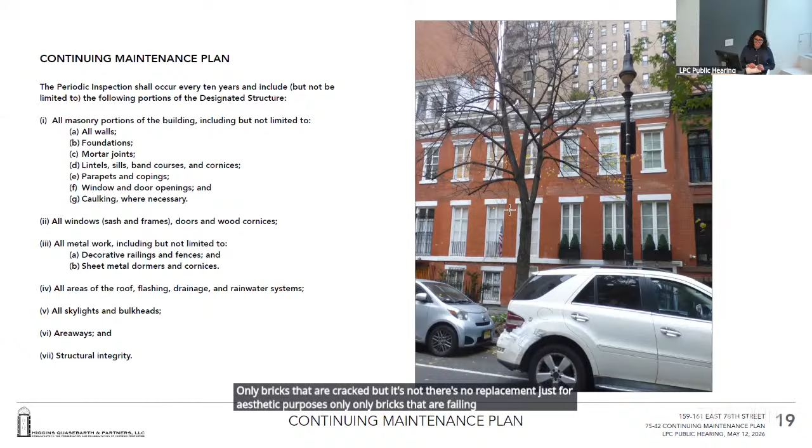Thank you. Any other questions, commissioners? Oh, Corey? Yeah, I just wanted to follow up on that, just so it's clear for everyone on that question that Commissioner Goldblum just raised.

The staff had made 2 recommendations for additional work, and as the applicant noted, the only brick replacement is for spalled or cracked brick, not for cosmetic reasons. The 2 areas pointed out, visible in this photo between the parlor floor and the second floor, roughly 1 foot tall, several courses of brick, where there's different replacement brick between the 2 buildings that generally doesn't match the existing brick well. Those are not proposed in this current scope to be replaced; they are proposed to be retained. That was one of the staff's recommendations, and I think it would apply to the former air conditioning unit location as well. The second staff recommendation had to do with the paint.

As you can see in the photos, there is a white paint installed on many of the brownstone features on both facades of these 2 buildings, and also the third building to the left, but not on the pair of buildings to the right. Looking at the historic photographs, there's a mixed history with regard to the presence of paint on some of these features, even as far back as the tax photos, but certainly not original to the building. As everyone knows, in many cases paints and coatings can cause further damage to underlying masonry—not always, but often. So that was the other recommendation by the staff.

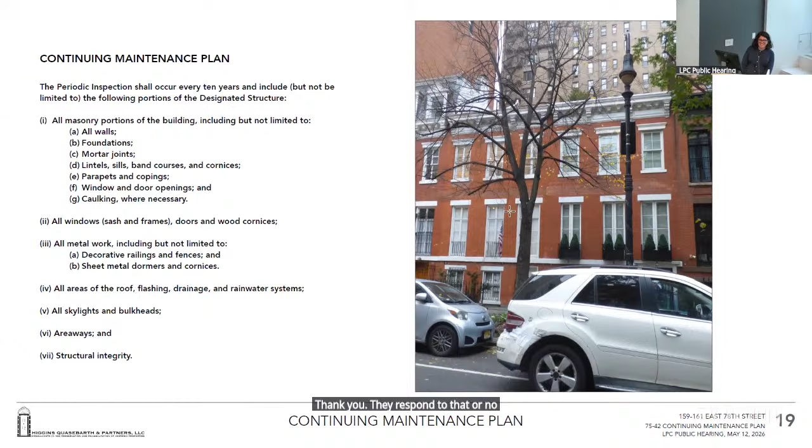Thank you. May I respond to that or no? No, we're still going to take testimony. Do you want to respond right now, or wait until we have all the comments? Okay, yeah, sounds good.

So let's go ahead and move to public testimony. We have somebody signed up to speak.

We have Zainab Turan. Vice Chair Master, Commissioners, my name is Zainab Turan, and I'm speaking on behalf of Friends of the Upper East Side. Friends Preservation Committee appreciates the restorative work and the proposed continuing maintenance program intended to safeguard these two landmark row houses.

However, because owners of landmark buildings are already legally obligated under the 1965 Landmarks Law to maintain their properties in good repair, we urge the Commission to establish a more rigorous and enforceable preservation framework with higher standards, such as requiring new windows to match the historic wood material and painted finish. These additional protections are especially warranted given the substantial financial benefit the owners stand to realize through the sale of their air rights.

The committee also requests clear oversight and accountability measures regarding the proposed allocation of proceeds to fund the continuing maintenance program. Specifically, we seek clarification on which entity will be responsible for monitoring ongoing compliance with the maintenance program, what reporting and enforcement mechanisms will be established to ensure adherence to these obligations, and which authority will have the power to impose penalties or corrective actions should owners fail to meet program requirements. Friends believe these critical policy issues should be resolved, not only for the present application, but also to establish meaningful standards and precedents for all future TDR proposals involving landmark properties. Thank you, Commissioners.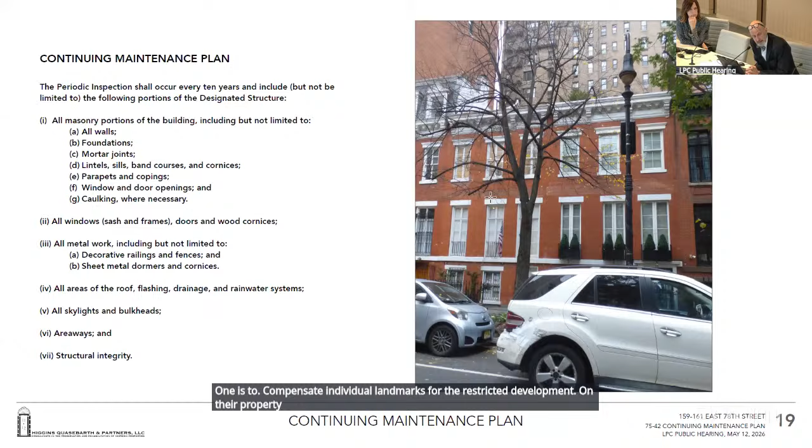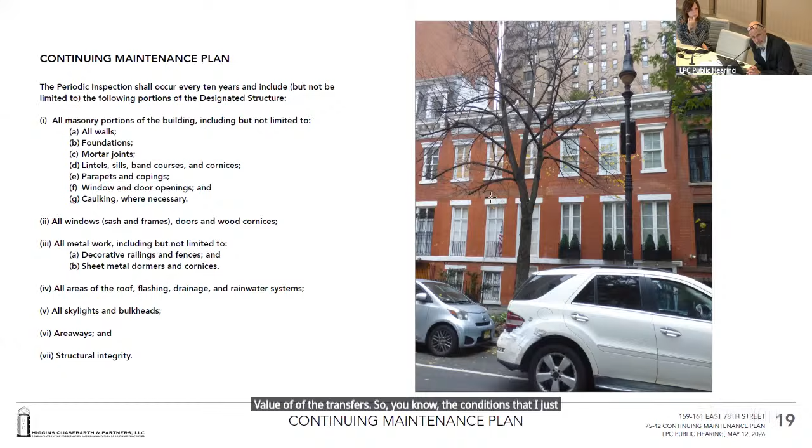I would also note that historically, transfer of development rights has served two purposes. One is to compensate individual landmarks for the restricted development on their property, because unlike within historic districts, most of them don't benefit from nearby restrictions on their neighbors. Secondly, the commission has never required that every dollar of these transactions be put into a maintenance account or used solely to benefit the landmark. Indeed, for the transfers out of Grand Central, historically, going back to the 80s, they're at 5% of the overall value of the transfers. So the conditions I described are very much in line, if not more stringent, than they have been in the past. I'm happy to answer any questions.

And just following up, those obligations follow the property irrespective of the owner, right?

Absolutely. Thank you. And Commissioner Ginsberg? Mark, my understanding is the Grand Central case that allowed us to proceed partially was based on the ability to transfer the air rights. That's correct. Thank you. And the commission has long been in favor of allowing development rights to be transferred further afield than they were under 74-79, precisely because it wasn't very useful. In most cases there weren't receiving sites that could take these sites.

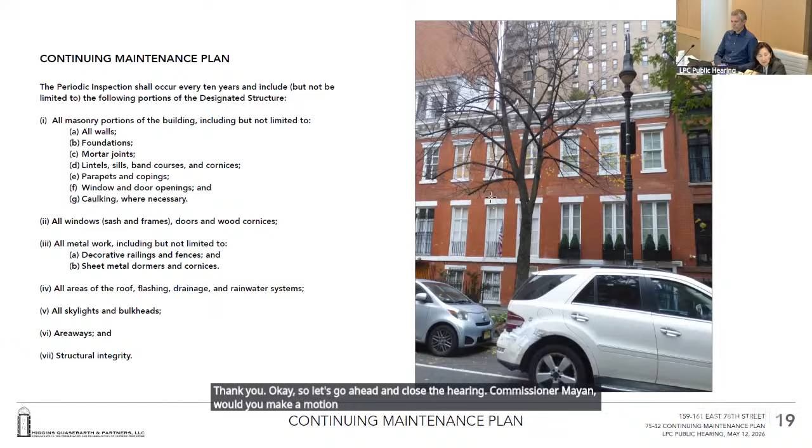Commissioner Goldblum, would you like to start this discussion? Thank you. Yes.

I think it's really, really important that the commission has this tool to give to property owners. When we hear about people who oppose designation, which is not infrequent, think about the Willoughby site we just saw. It's all about how it's a burden to own a landmark building, a restriction, it devalues the property—none of which are really supported by facts, but that doesn't stop people from thinking that way, the public from thinking that way, and people in government from thinking that way.

And I think it's really important that we find tools to facilitate, to make people who own landmark buildings feel like it's not all stick and that there's some carrot. Especially at a time when we're trying to find ways to develop new housing, and when we can't always allow for the maximum FAR within historic districts for our own reasons, I think the ability to transfer those air rights out and monetize your property is good.

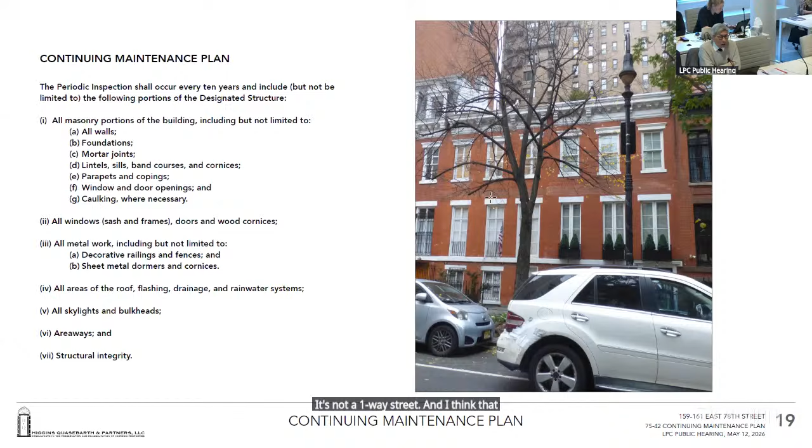Thank you. Commissioner Chen? Yeah, and just to follow up on what Mark was just talking about, I think this is a very important process for us. And I think this is a two-way street, not a one-way street. Given especially all the other landmarks that are in need of repair and trying to do the upkeep, the struggle, we see it on a weekly basis. I think that this is a tool, and obviously more needs to be examined in the future about the process and the monitoring of these maintenance agreements, the cyclical nature, how many years — I think that will be for future discussions. But in general, I agree with the statements.

Thank you. Yeah, I agree with Commissioner Goldblum, and I appreciate what he said and how he said it. I think he articulated very well the use of these TDRs, a relatively new tool for us. And I agree with his comments and the staff comments about the mismatched bricks in the front and the removing of the painting.

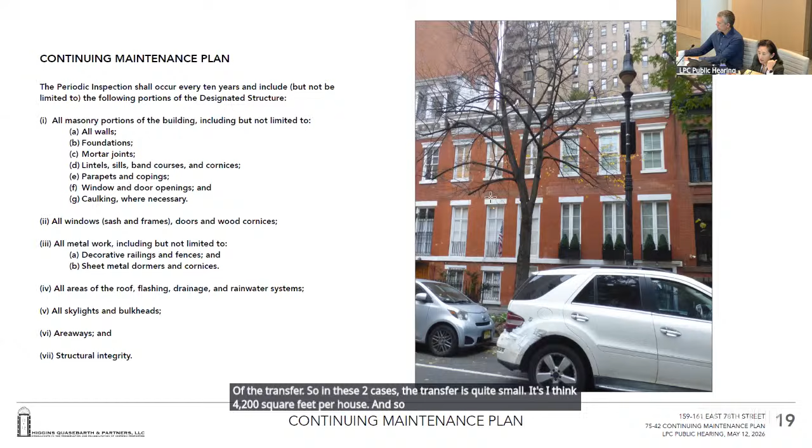The other thing I just wanted to add is that we're also cognizant of the scope of the transfer. In these two cases, the transfer is quite small — I think 4,200 square feet per house. So I think that with a bigger scope, where you're getting significantly more funds, we could probably ask for more work to be done. But we have to be sensitive to require something that's commensurate with what we're getting. Commissioner Ginsberg?

I think Commissioner Goldblum stated it very well, and I think this is, as others have said, another tool in the toolbox to strengthen and make it easier for landmark owners to preserve their buildings. Thank you.

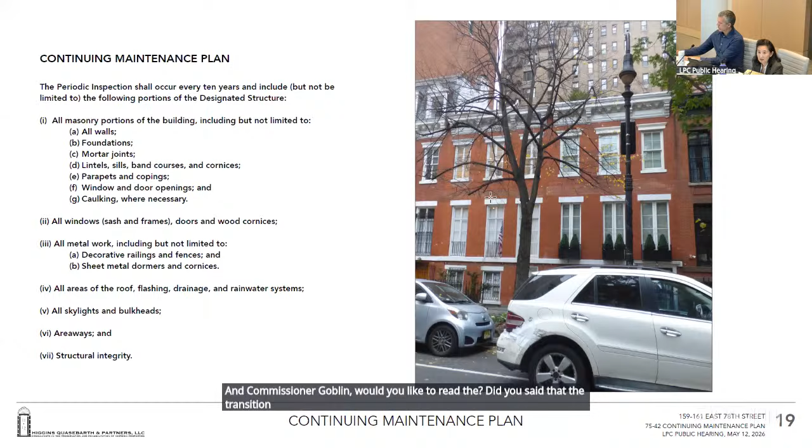Commissioner Mahan? I agree with my fellow commissioners. Thank you. And Commissioner Goldblum, would you like to read the — you said that the transfers are 4,200 per building in this case? The buildings themselves are 1,800 square feet each, according to the DOB. Wow, sorry — 2,000 square feet each. So it might be significant, a little bit in terms of the macro world scale, but for these buildings, it's a lot. Wow, wow.

Right, yeah, these guys are, right. But yeah.

I totally agree. Anyway, regarding 159 East 78th Street, individual landmark, the application is to request that the Landmarks Preservation Commission issue a favorable report to the City Planning Commission regarding the continuing maintenance program for the landmark in connection.

With the transfer of development rights pursuant to Section 75-42 of the zoning resolution, I recommend approval with modifications, finding that the owners have committed themselves to upfront restoration and maintenance work that will reinforce the special architectural and historic character of the building and aid in its long-term preservation, that the owners have committed themselves to establishing a perpetual cyclical maintenance program to ensure the continued maintenance and preservation of the building, which will be legally enforceable by the Landmarks Preservation Commission under the provisions of a continuing maintenance agreement, binding all heirs, successors, and assigns, and recorded in the New York County Register's Office. The restrictive declaration will require that 10% of the gross proceeds be deposited into a fund dedicated to supporting the cyclical maintenance plan.

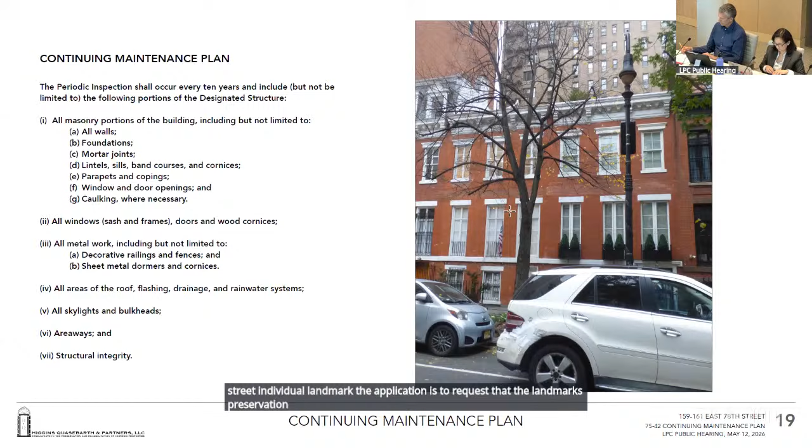Okay, that's been approved. Commissioner Goldblum, can you read the second one? Regarding 161 East 78th Street, individual landmark, the application is to request that the Landmarks Preservation Commission issue a favorable report to the City Planning Commission regarding the continuing maintenance program for the landmark in connection with a transfer of development rights pursuant to Section 75-42 of the zoning resolution.

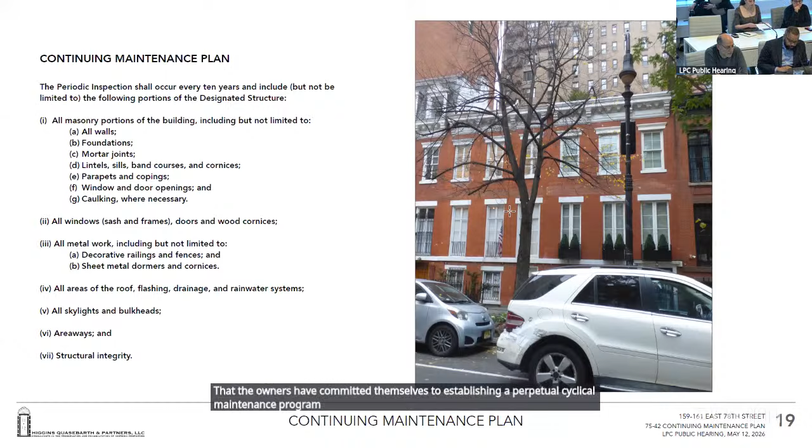I recommend approval with modifications, finding that the owners have committed themselves to upfront restoration and maintenance work that will reinforce the special architectural and historic character of the building and aid in its long-term preservation, that the owners have committed themselves to establishing a perpetual cyclical maintenance program to ensure the continued maintenance and preservation of the building, and that will be legally enforceable by the Landmarks Preservation Commission under the provisions of a continuing maintenance agreement, which will bind all heirs, successors, and assigns, and which will be recorded at the New York County Register's Office, and that the restrictive declaration will require that 10% of the gross proceeds will be deposited into a fund dedicated to supporting the cyclical maintenance plan.

However, I recommend that the initial restoration work be expanded to include replacing previously installed mismatched bricks and removing paint and resurfacing brownstone at the primary facade.

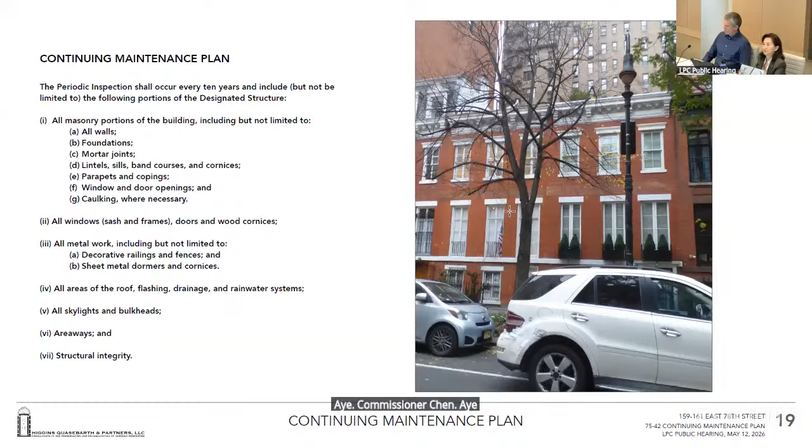Thank you. Commissioner Mahan, would you second that? Second. Thank you. Mark, will you call the vote? Vice Chair Master, aye. Commissioner Chen, aye. Commissioner Ginsberg, aye. Commissioner Goldblum, aye. Commissioner Quembe, aye. Commissioner Mann, aye. With six in favor, none opposed, the motion passes. Okay, that's been approved with modifications.

Thank you. Okay, now Cory, I think, wanted to say a couple words. Yes, thanks.

We are going to be breaking for lunch soon, but before we get there, I wanted to take this opportunity to acknowledge one of our longtime Preservation Department staff, Mishael Shabrami, who's in the audience today. She is leaving LPC for a historic preservation job with the MTA, so her last day will be this week. Mishael's been in the Preservation Department for just about 20 years, not quite there, but very close, and has been a valuable staff person all that time. You've all seen her a number of times during public hearings, most notably for parks projects and quite a few Madison Avenue storefronts. But in general, we all wish you the very best, Mishael. Thank you for your very long career here, and I hope that continues at the MTA. You've made your mark here at LPC in the Preservation Department, working hard for the city as a whole. So thank you again.

I just wanted to thank Cory for the kind words and his leadership, and show immense gratitude to all of you commissioners for volunteering your time and expertise to make very important decisions that benefit our beloved city and help retain and restore our culturally and aesthetically significant architecture. I will definitely think fondly on my past 20 years at LPC, especially with regards to our very hardworking, devoted staff that I cherish both my professional and personal relationships with. I take so much pride in putting my fingerprint on the history of New York. So thank you all.